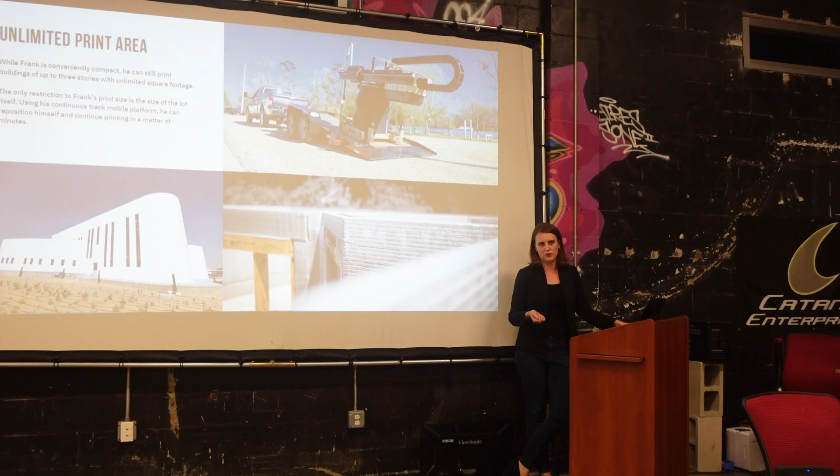But today I also would like to tell you about our company and what we do. Our name is Apis Cor. Apis, from Latin, actually means bee. And as you know, bees use an extrusion process to build their houses. So this is the inspiration for our company. And as I said in the video, we 3D printed the huge building in Dubai. It's officially a Guinness world record, officially the biggest building ever 3D printed on Earth.

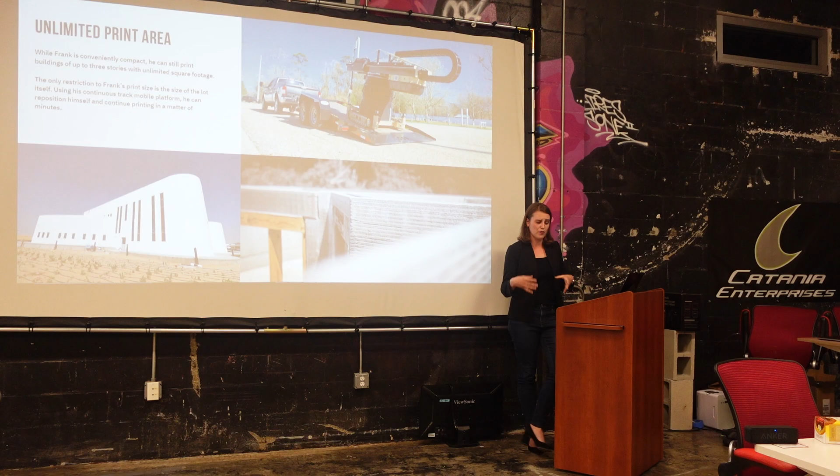And it was possible because we have a completely different technology from what is offered in the industry today. We have a portable solution that you can easily move around the construction site, and this is how you can build houses and buildings of unlimited square footage. This building in Dubai, for example, had around 11 or even 12 locations for the printer, and we just moved the printer around. And this is how we managed to print this huge building.

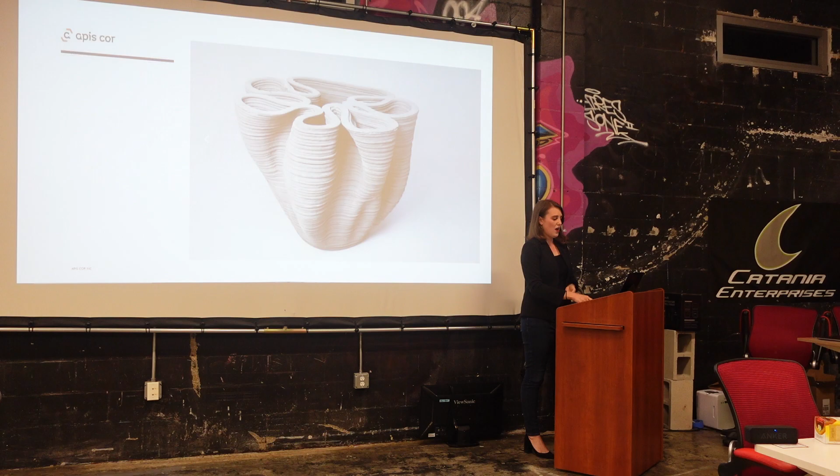So basically, there is a subtractive process, when you mill, for example, or cut out the material that you don't need, and this is how you get the shape that you want. But additive manufacturing is how to build the object without cutting everything out. You basically add as much material as you need and create the shape that you need. So this is the additive process. And this process significantly reduces the amount of waste, and also you don't need to do all of the post-finishing.

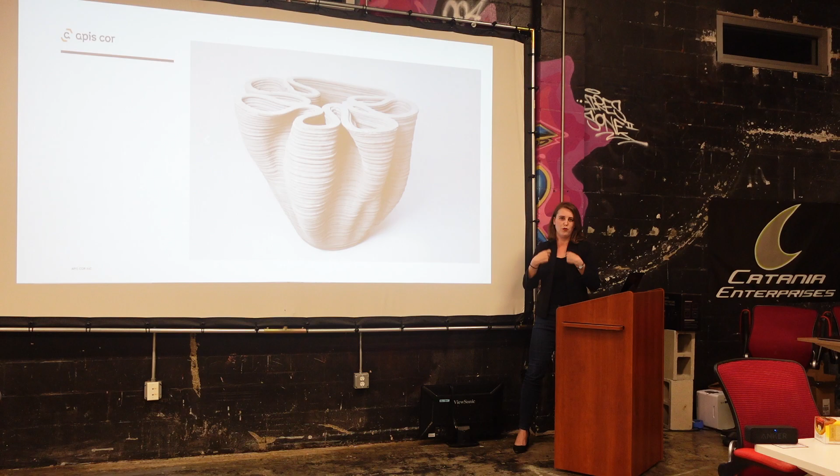Some people like it, somebody says, oh no, we will apply some stucco. But it's even cheaper to apply stucco to this type of wall compared to a concrete masonry unit wall. If you're lucky enough to have very good workers, they can build a very nice looking CMU wall. But sometimes that's not the case, so the quality is really different from project to project. With 3D printing technology, your quality is constant and consistent all the time, because you build houses with machine accuracy. So this is another advantage of applying robotics and machinery in construction 3D printing.

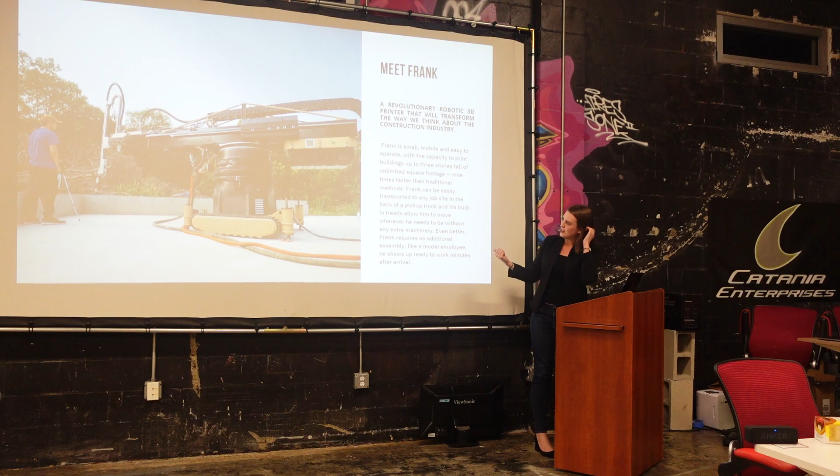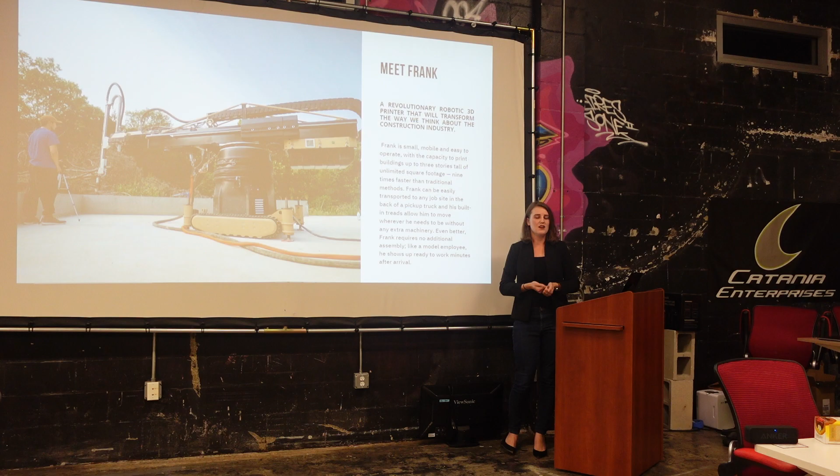And here you basically can see our robot. You can see that the robot is kind of large, but if you see the person there, it's actually Nick, our founder and inventor of the machine. Compared to a human-size object, it's not very huge, right? And a very significant advantage that our technology has, that you can see here, is continuous tracks, basically like caterpillar wheels, and using a joystick or a tablet, the printer moves. You don't need to use cranes or 10 people just to move and deploy the robot. It's basically almost autonomous.

And the printer also lifts up, up to 3 meters, that's like 9 feet. And then you also can put the printer on a very simple metal frame, and this is how you can increase the printing height. So this is another huge advantage of the mobile and portable robot that we developed and use to 3D print houses. And this is a picture of our recent project that we're going to release soon, so stay tuned for more announcements.

And I assume the question that you probably have right now in your head is, is it safe and sound? How is it reinforced? It looks nice, but is it really strong? So yes, the house that we print and the material that we develop allow us to print wall structures that are structurally the same as concrete masonry unit walls, and it's actually stronger, almost 30% stronger. And this is how we can ensure that the walls of the 3D printed house are structurally safe and sound and also comply with the building codes.

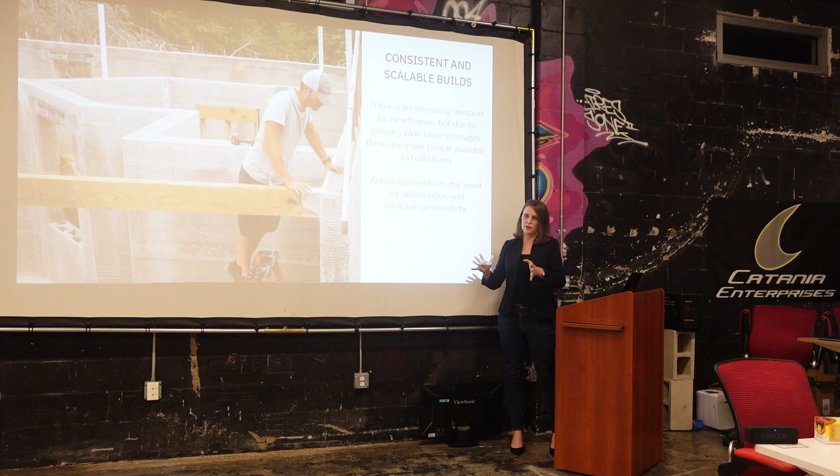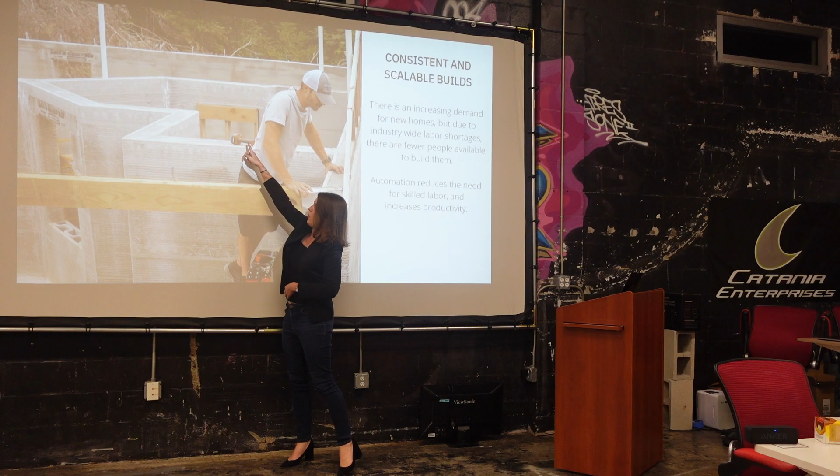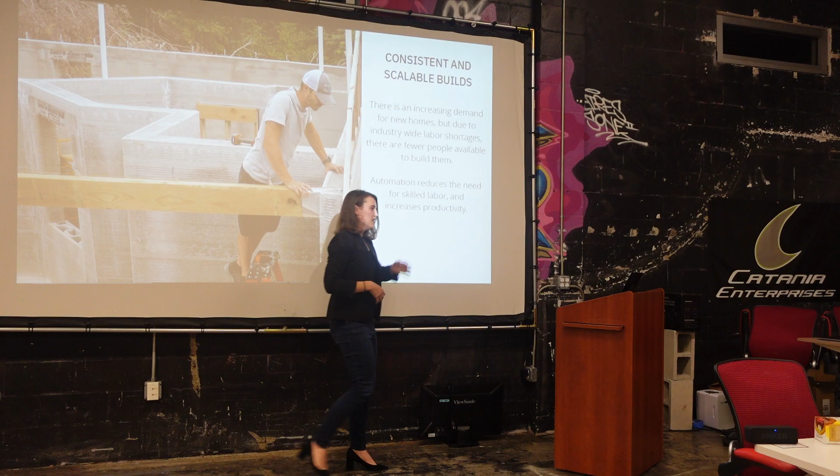And when I say that we do basically the same as concrete masonry unit walls and comply with the building codes, that means that everything, structurally, is done the same as CMU walls. So here you can see the bond beam, for example. Again, it's done the same as for the CMU wall. And here you can see the joists, even the schedules for the openings, the doors and windows. And here, for example, is the precast U-lintel that is also used in masonry construction. So we combined what is already approved and used and incorporated it in our innovative approach.

And here you also can see how the roof is starting to be built. This is the project during the final stage of construction. A lot of wood and everything, but you can see that the walls are printed. And actually when we say 3D printed houses, it's important to understand that only the walls are 3D printed. And even having just the walls 3D printed is already a huge step forward in how we can increase productivity, because the wall structure, the shell of a house, is one of the biggest parts of the construction.

Of course, it depends on the quality of the people who work to build a structure, but in general, if you don't have walls, you don't have a building, right? You don't have a house. And if we can significantly increase the productivity of this process, it's already a significant advancement. For example, when you use an electric drill, you don't say, oh, it only does the screws, right? Of course, you can use a manual screwdriver, and after 100 screws you will probably be done with it forever. So we use the electric screwdriver because power tools help us do the hard work faster, easier, and increase productivity.

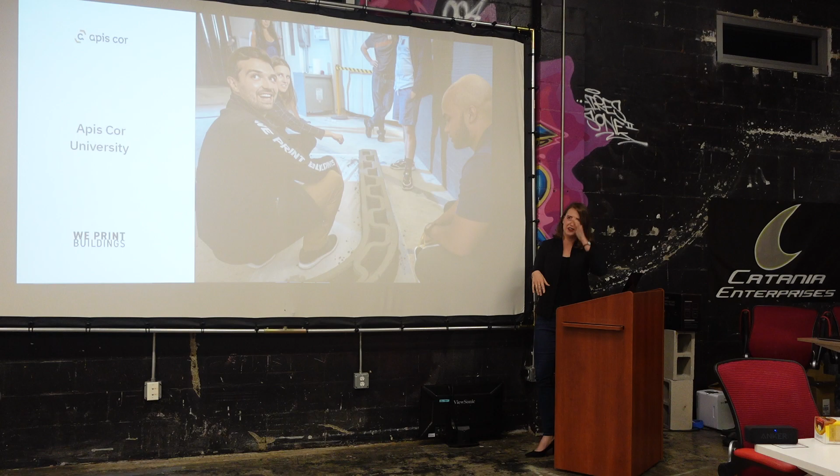And so I'll stop here. I would say that this technology is not something that you can learn from a 10 minute presentation or a two hour presentation. Sometimes it really requires days. So this is why we created the Apis Cor University. It's basically online courses and in-house workshops where you can actually come and see how everything works. Here, for example, is a picture from one of our workshops. We do live printing, where you can touch the material and see how it's completely different.

And actually, the 3D print material is not concrete. It's cement mortar, but it's still much stronger than regular concrete. Again, that's a whole other story about the material side. So if you want to really learn more about the technology and commit some time for this, we would be happy to see you at Apis Cor University. Thank you.

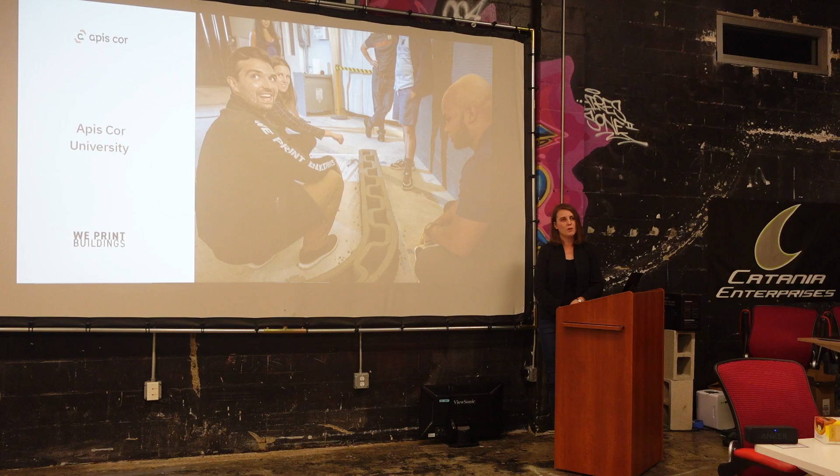Yeah, of course. Go for it right there. Hi. So I want to know about the rebar reinforcement. Of course rebar is a giant rod, right? And I'm thinking of it sticking up from the base. So as you're printing the base, the nozzle has to go through. So how are you going around the rebar? I gotcha. Yeah.

So basically, first you drill the concrete, and then you print the walls. Once you're 1 foot tall, you install the first piece of rebar. And once you complete the entire wall, you install the remaining part of the rebar. And then you can fill it back in? Yes, and then you fill everything. Again, we didn't invent this. It has existed in the building codes for many years. We just match and comply with everything that's already required. Okay. Thank you. Yep, absolutely.